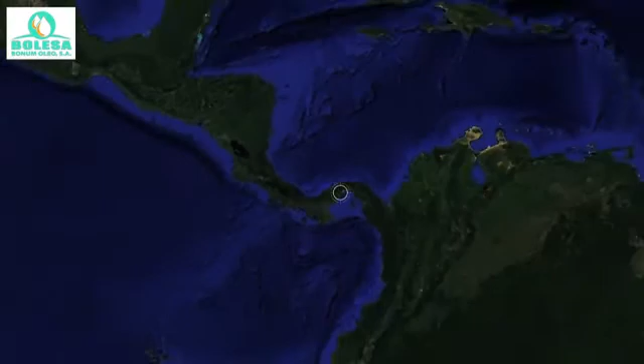The locations of both operational facilities have been strategically selected to ensure fast, close and easy access to the different oceans and global trade routes.

Rodman Port, the operational base. The main activities to be developed by Bonum Oleo at Rodman Port are: receive tanker ships with base oils required for the production of lubricants, bulk storage of base oils, reception and storage of used oils supplied by ships transiting the Panama Canal, storage of finished packaged products, and dispatching lubricants for ships in transit for direct consumption.

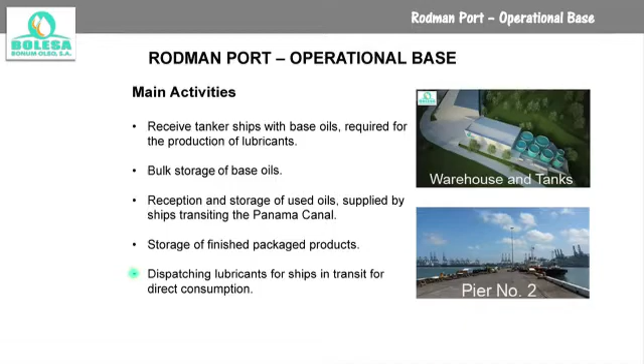At Rodman Port, Pier number 2 has been assigned to unload base oils.

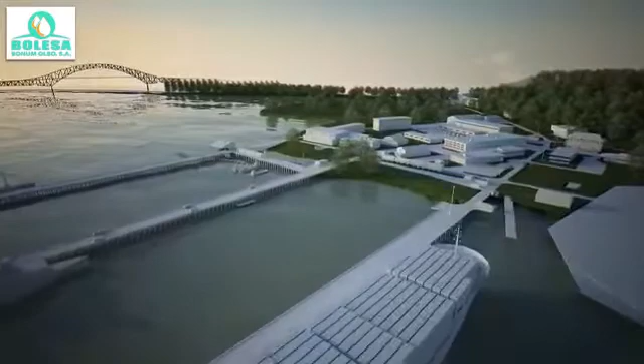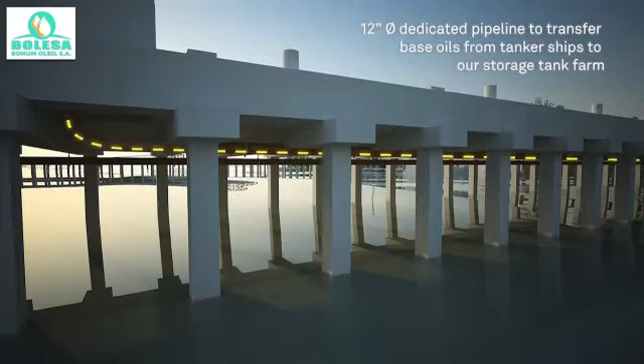As part of our operational activities at Rodman Port, we own a dedicated pipeline to transfer base oils from tanker ships to our storage tank farm.

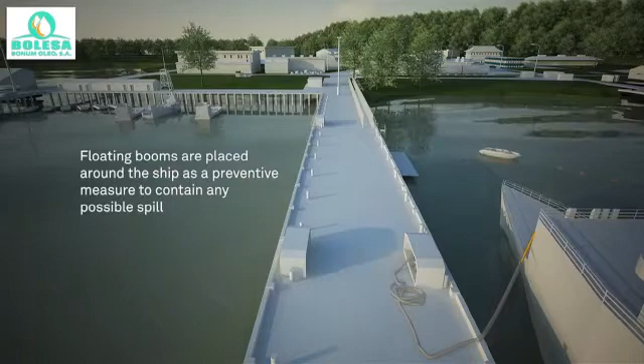Once the ships arrive, the reception of base oil procedures are commenced. Our first actions are based on safety and security mechanisms. One of them is the floating booms that are placed around the ships as a preventive measure to contain any possible spill. The base oils are analysed in our laboratory to verify their properties before authorising the ships to unload.

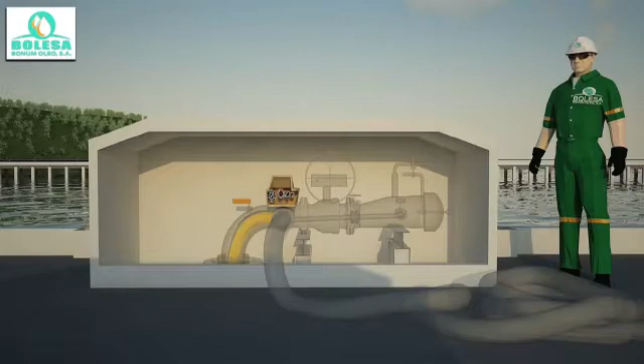The pipeline has several accessories that allow the operator to make a transfer process of the base oil reliably, such as the pig launcher, to release the pig sphere and be able to separate different base oils and avoid cross-contamination.

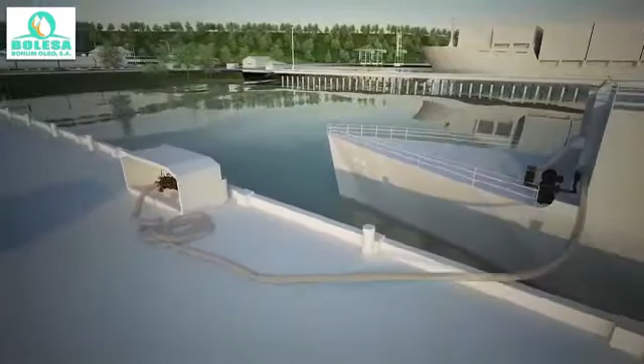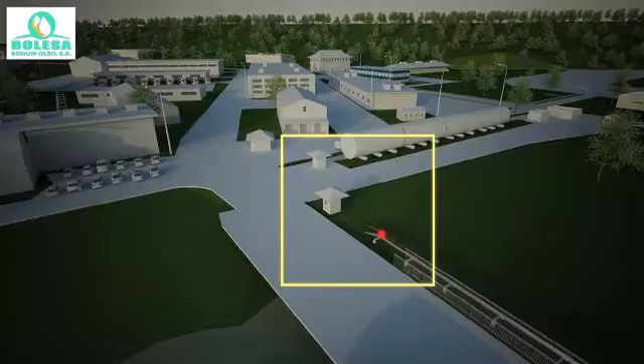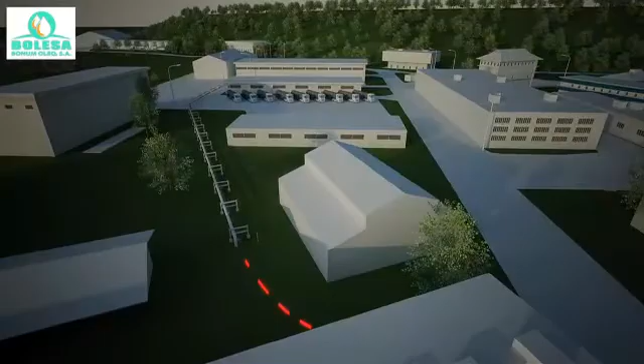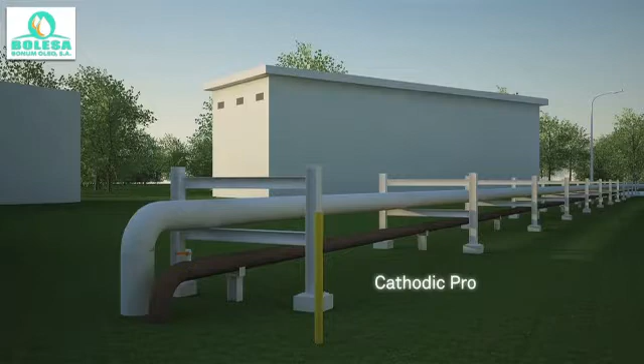Check valve, to minimize the possibility of spills within the Panama Canal. Pig signal, used to provide confirmation of the movement of the pig sphere through the pipeline. Cathodic protection has been applied to our pipeline to prevent corrosion.

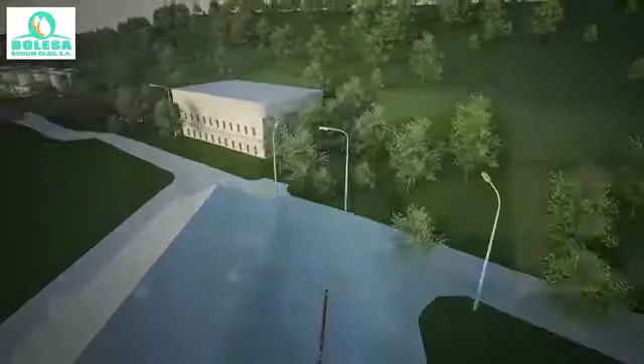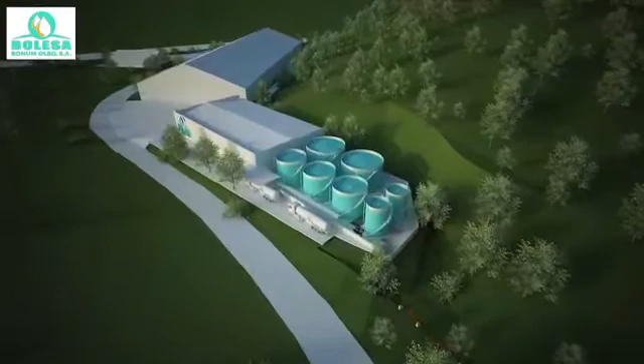After travelling 759 metres, the sphere reaches the pig catcher station.

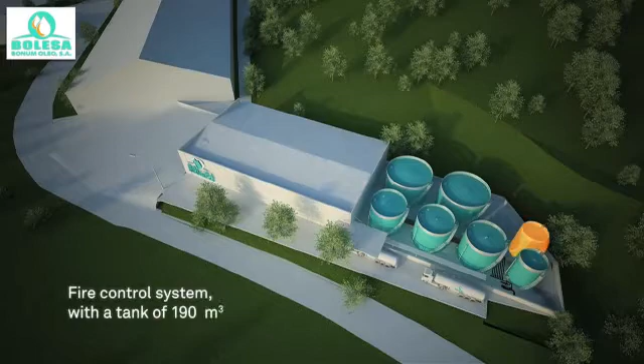The operational base in Rodman Port has an area of 3,100 square metres, with other facilities as follows: 5 tanks for the storage of base oils with a total capacity of 2,800 cubic metres, 1 tank for used oils with a capacity of 190 cubic metres, a fire control system with a tank of 190 cubic metres, and a water treatment plant to handle the effluent generated.

A warehouse for finished products with a capacity of 500 pallets, including storage of free nationalised products, and the loading station for the transfer of the base oils to the lubricants factory.

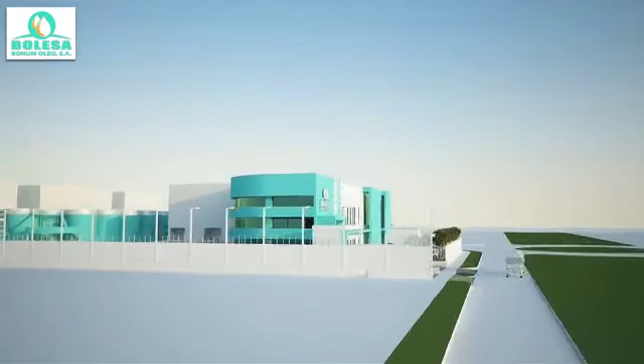Bonum Oleo's headquarters are located in Parque Industrial de las Americas, and its facilities are considered the most modern lubricants factory in the region.

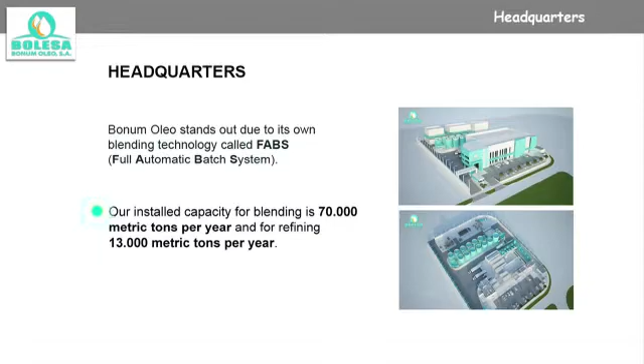Also, Bonum Oleo stands out due to its own blending technology called FABS, F-A-B-S, Full Automatic Batch System. Our installed capacity for blending is 70,000 metric tonnes per year, and for refining 13,000 metric tonnes per year.

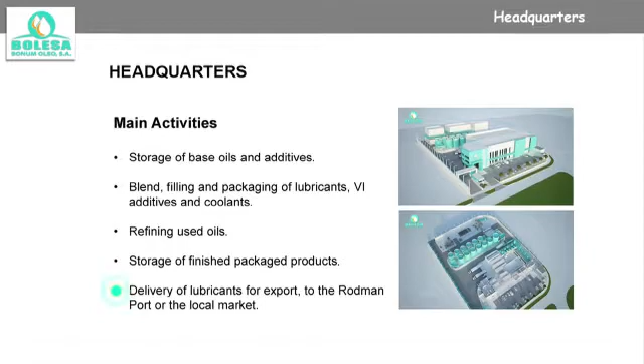The main activities in this facility are storage of base oils and additives, blend, filling and packaging of lubricants, VI additives and coolants, refining used oils, storage of finished packaged products, and delivery of lubricants for export to the Rodman Port or the local market.

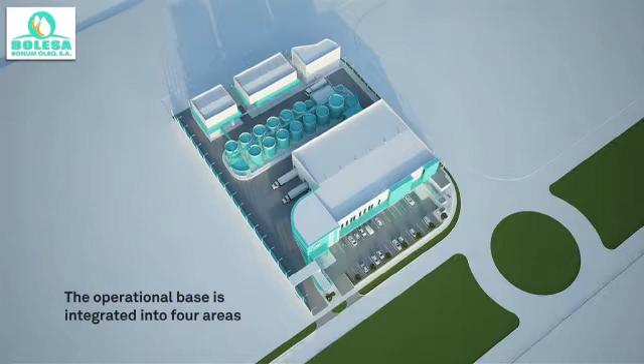The operational base is integrated into 4 areas: the tank farm, used oils refinery and maintenance area, lubricants building, and administrative building and customs.

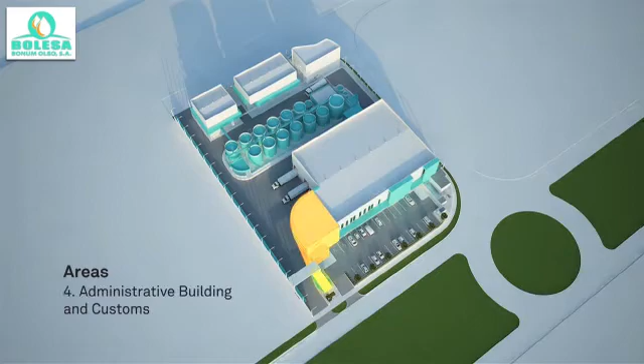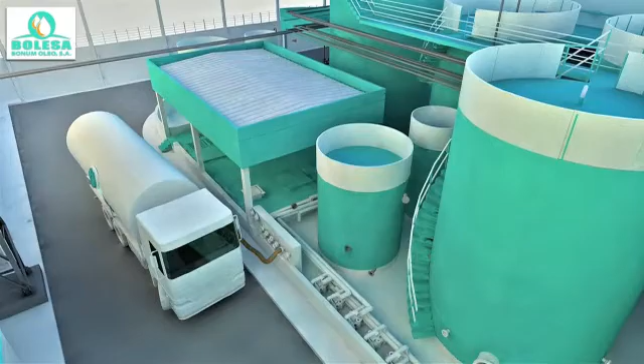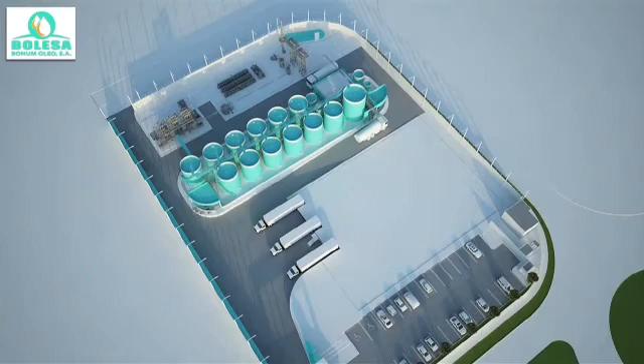The tank farm receives bulk material, while the base oils received in tanker ships are transported from Rodman Port to our headquarters using tanker trucks owned by Bonum Oleo. In order to comply with quality procedures, base oils and other materials are first evaluated prior to authorizing the unloading process.

The tank farm includes several tanks for the storage of raw materials and others, such as Family A, related to the blending process, with a total capacity of 1,365 cubic meters, includes base oils from the Rodman Port, base oils from the refining process of used oils, and synthetic base oils.

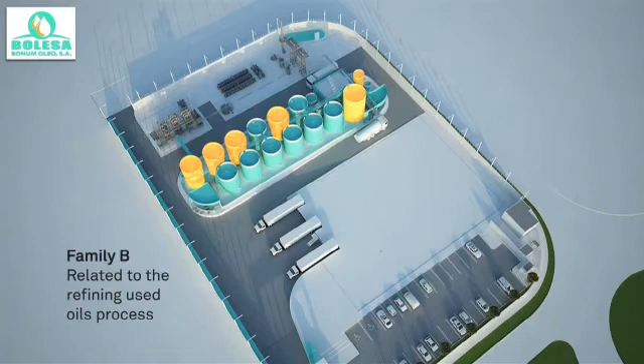And Family B, related to the refining used oils process, includes untreated used oils, pre-polished re-refined oils, asphaltenes, light diesel obtained from refining, bunker fuel, treated water, cooling water systems, water for the fire control system, and diesel fuel for internal use.

In the tank farm area, there is also equipment and stations required for our manufacturing and refining process, such as pump houses and flow meters, and a water treatment plant.

Refining used oils: Bonum Oleo offers an innovative and self-owned technology called Green Technology to bring a solution through regenerative refining techniques for the appropriate and responsible disposal of used oils. The technology has been evaluated to ensure the best performance to obtain new products of high quality and minimal waste generation. Our refining capacity is 13,000 metric tons per year.

The products obtained from the regeneration process are refined base oils Group 1 Plus, with technical specifications that exceed standard base oils, and bunker fuel Grade A.

Refining process of the used oils. Used oils from the industrial, marine and automotive sectors are received in our lubricants factory and are evaluated prior to discharge. The approved used oils are discharged into a tank for primary dewatering. Once the process is finished, the oil is transferred to the used lube oil storage tank.

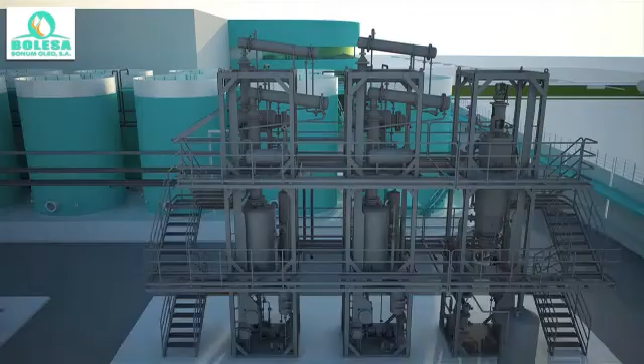Then the oil is filtered and passed to a stripping tower where it is heated in order to remove the remaining water and low flash point hydrocarbons. The extracted hydrocarbons are condensed and separated from the water to obtain light diesel.

In the second phase, dehydrated used oils pass to a vacuum distillation tower and then heated up to the programmed cut separation viscosity. The product obtained is accumulated into the pre-polished re-refined oils tank.

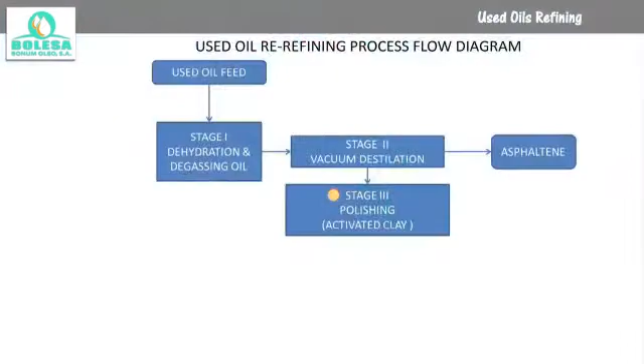The third phase is referred to as the bleaching and polishing process of re-refined oils through adsorption techniques using active clays.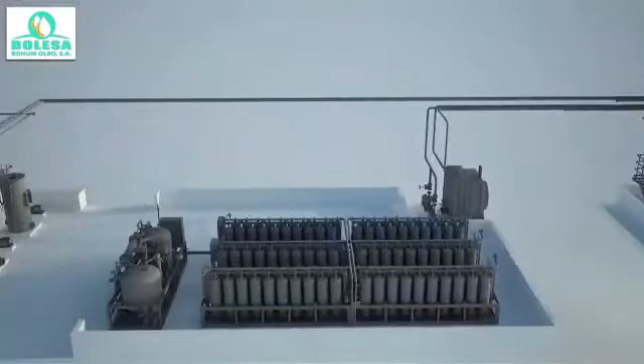Vapors and gases resulting from the process are transferred to a treatment system in order to ensure minimal emissions, with concentrations well below local and international environmental regulations.

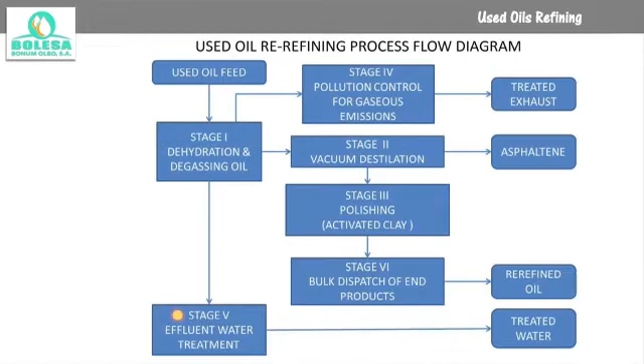The extracted water is then transferred to our water treatment plant for its adaptation to the required parameters by law prior to disposal.

The laboratory. Among the major activities developed within the laboratory are approval of raw materials, approval of production samples, analysis of used oils, and development of new products.

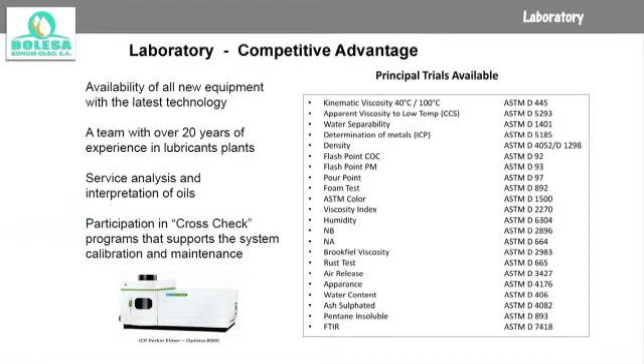The most competitive advantages of our laboratory are availability of all new equipment with the latest technology, a team with over 20 years of experience in lubricants plants, service analysis and interpretation of oils, and participation in cross-check programs that supports the system calibration and maintenance.

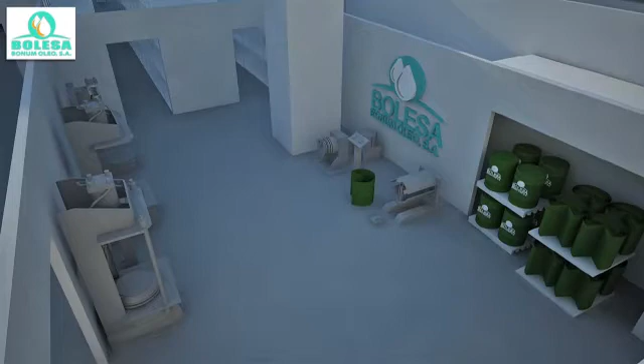The drum assembly area. The plant has a compact drum assembly line pre-built, minimizing optimal physical space and shipping costs of raw material. The phases of the assembly are turning, banding,

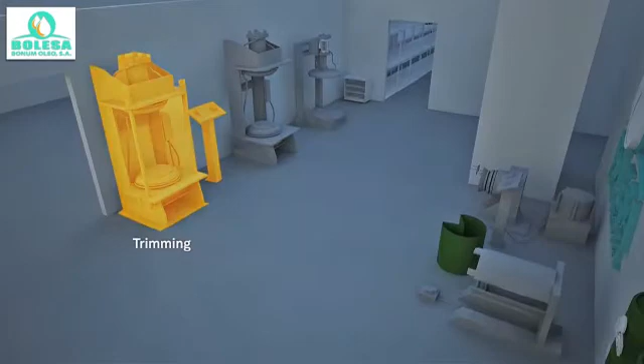trimming, top and bottom stapling, and tightness test.

Packaging area. The last step of the whole process is carried out in the packaging area, where the manufactured lubricant is packaged in different presentations. The filling and packaging area is composed of the following lines.

Line 1 for filling tanks of 55 gallons or 208 litres with a capacity of 60 units per hour, and filling IBC 275 gallons or 1,040 litres with a capacity of 12 units per hour.

Line 2 for filling 5-gallon containers with a capacity of 500 units per hour. Line 3 to fill a quart or litre with a capacity to pack 6,340 units per hour and is used to fill presentations 1 gallon or 4 litres with a capacity of 1,585 units per hour.

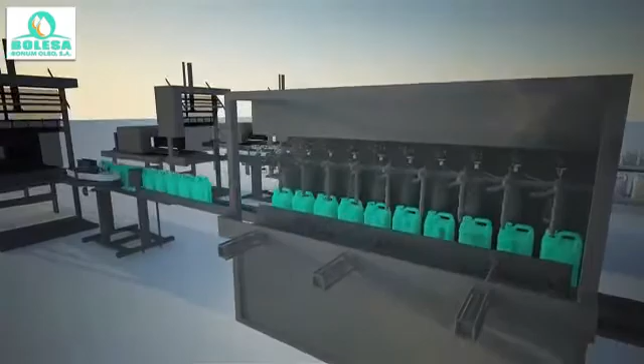Line 4, this line has facilities for filling aqueous products for vehicle care as antifreeze, brake fluids and anti-corrosion. Line 5, bulk shipments line dedicated to the tanker trucks, loading ISO tanks and flexi bags with the capacity to load 4,000 gallons or 15,000 litres per hour.

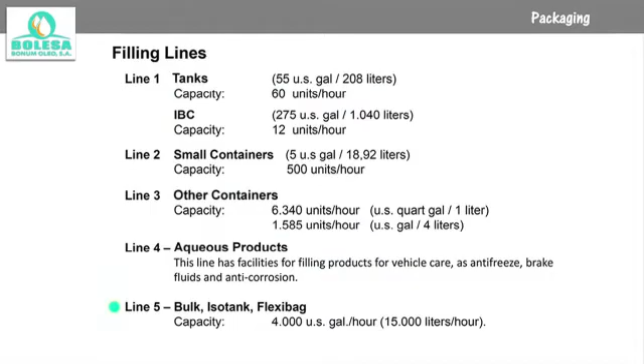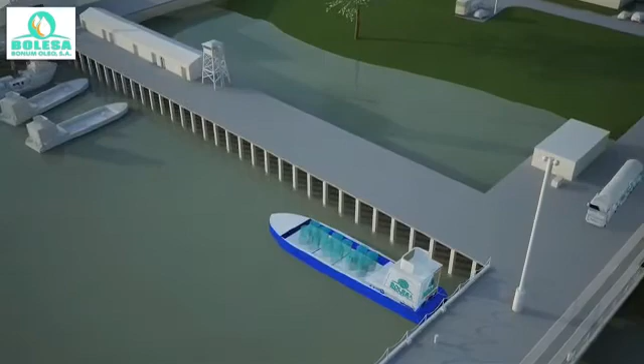Finished product dispatch at Rodman Port. The finished lubricants in bulk or packaged presentations to be dispatched to the ships on transit through the Panama Canal arrive to the pier by tanker trucks or other loading vehicles.

Once the product arrives to the pier, it is placed into a barge owned by Bonum Oleo, which sails a distance no more than 5 nautical miles from the pier to the ship's anchorage zone.

The ships waiting to cross the Panama Canal have an average wait of 48 hours, which gives us enough time for dispatch without generating delays or penalties for not complying with time delivery. However, if so, we can dispatch when the ship docks in any port of the Republic of Panama.

Once the barge is moored next to the receiving vessel, it has the necessary facilities for the delivery of the bulk or packaged product, as well as for receiving used oils.

For this reason, in refining and lubricants manufacture, Bonum Oleo is your best ally.